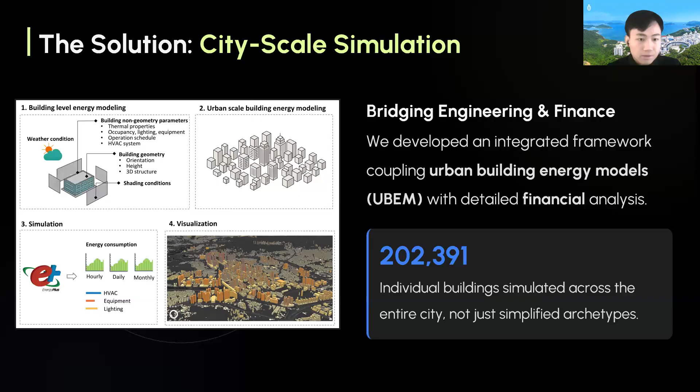To calculate the decarbonization potential, we evaluate 5 retrofit pathways for urban decarbonization: lighting upgrades, chiller replacement, rooftop PV deployment, and upgrades of windows and the envelope. We analyze not only the cost benefits, but also the environmental benefits such as energy savings and carbon reduction.

To support policy decision making, we calculate 5 indicators: energy savings and carbon reduction as the environmental benefits, and financial indicators such as payback period, internal rate of return, and market potential of each retrofit measure.

To provide a more visualization effect, we developed a digital twin platform for urban decarbonization. It's open not only to government but also to the public as an interactive dashboard, and I can switch to our platform and show it now.

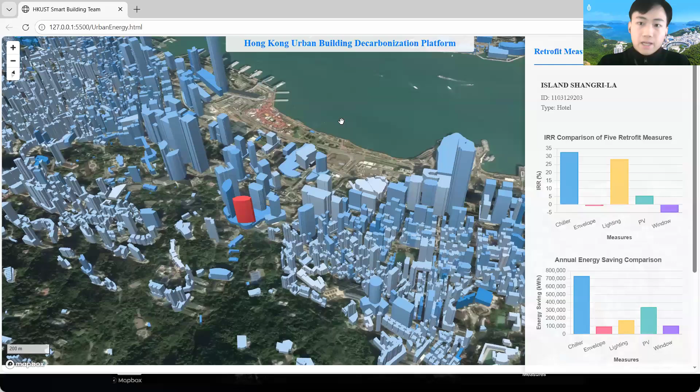And we can see all the buildings in Hong Kong are located in a basic satellite image map. And if we click one building, it first shows some basic information of the buildings,

such as the name of the buildings, the ID in the database, and the type of the buildings. And it will show the internal rate of return of the 5 retrofit measures. We can see in this hotel building, the chiller retrofits achieve the best performance of investment, and the second one is the lighting upgrades. But the envelope and the window upgrades in this hotel building are not economical.

Despite the financial indicators, we also calculate the energy savings and the carbon reductions. We can see the chiller and the PV will achieve the best performance of energy savings and also carbon reduction. For each building, we calculate all the parameters. So in our interactive platform, it will show all the information of the decarbonization potential for all buildings.

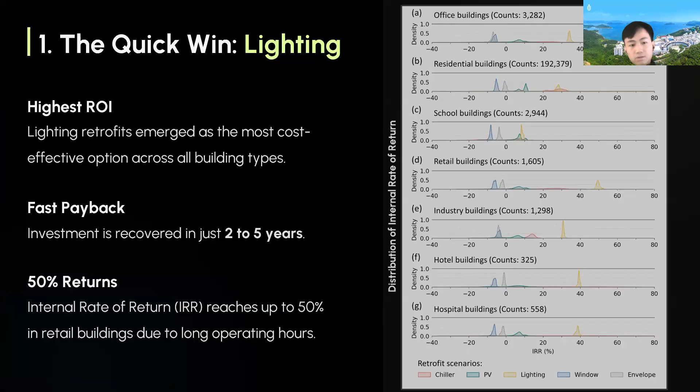So through our analysis of our results, the quick win is the lighting, as the lighting not only shows the highest return on investment across all building types, but also shows the fast payback period, typically from 2 to 5 years. Especially in retail buildings in Hong Kong, the internal rate of return of the lighting retrofits can achieve about 50% due to the retail buildings relying on long operating hours.

Despite that, upgrading the chillers plays a key role for the grid stability in our results because it delivers the highest reduction in peak electricity demands, especially for school buildings, retail buildings, industry buildings, and office buildings in Hong Kong. But it may not always have the highest return on investment.

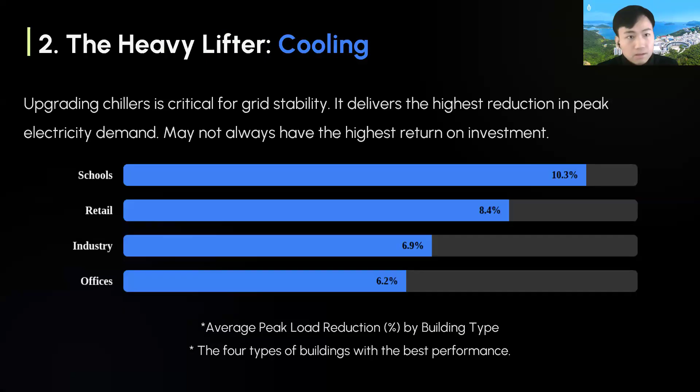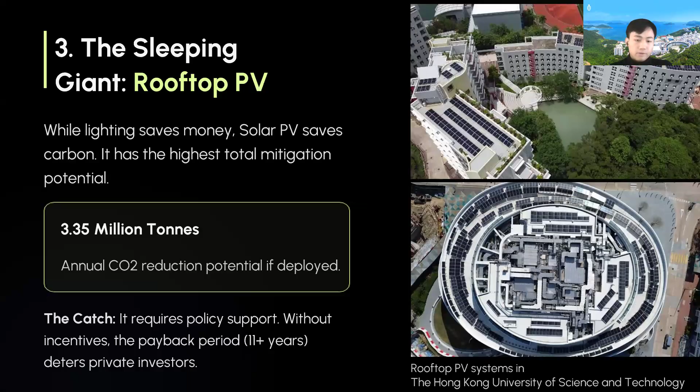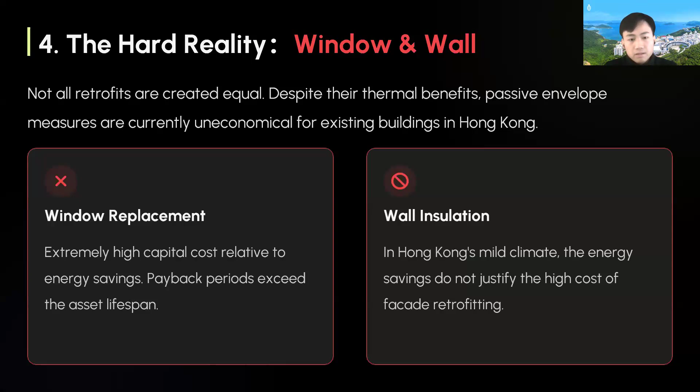But it requires policy support because the payback period of the investment of rooftop PV is often more than 11 years. And through our results, not all the retrofits are economical, such as the window replacement and the wall insulation upgrades, as the upfront investments are quite high, and the energy savings cannot recover the investment costs.

So to support policymaking, we propose to unlock the green finance. If we use an investment threshold of IRR at 50%, we can see the rooftop PV market in Hong Kong is very small. But if we lower the standards from 50% to 5%, the market will expand dramatically, and it will have over 25 billion market potential, and it will also unlock huge carbon emission reduction potential in Hong Kong.

So for the roadmap, we propose 3 strategic steps. The first one is to prioritize the lighting and the cooling retrofits because they have quick return on investment. The second is we can unlock the PV market potential through some policy to lower the IRR standard. And we need also to avoid deep envelope retrofit, such as the envelope and windows in Hong Kong, due to the humid and warm climate condition in Hong Kong.

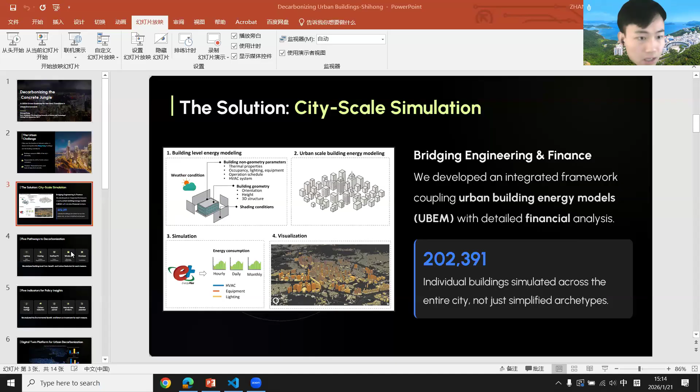As what I introduced, for the energy index, we just use energy savings, the annual electricity savings, and for the carbon reduction it's similar. For the financial indicators, we use payback period through the whole investment lifespan, the internal rate of return, and the market potential—these three indicators for the financial calculation.

Question: About the permeability, do you vary the air change rate depending on climatic conditions? We now use the typical meteorological year as our climate condition input, and we modeled the air change rates. But at this stage, we refer to the building standard and don't consider the variation of air change rates by climate conditions. Maybe in the future we can consider it.

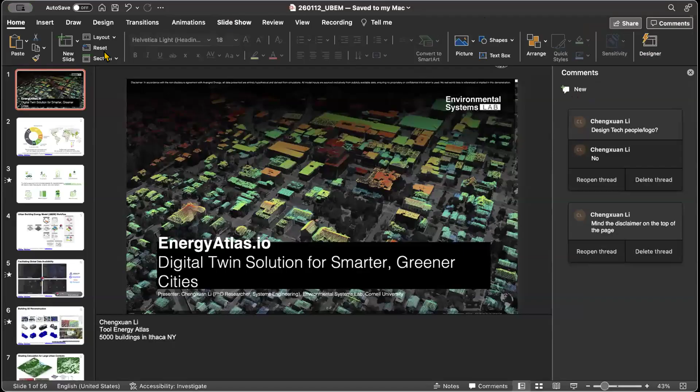Yes, okay. Hi everyone, my name is Chengxuan Li. I'm a PhD researcher in systems engineering in the Environmental Systems Lab, Cornell University. Today I'll be presenting Energy Atlas, the tool or digital twin solution for smarter and greener cities developed at Environmental Systems Lab. I'll be demonstrating a case study of an urban building energy model of the city of Ithaca, New York, simulating 5,000 buildings, etc. Let's kick off.

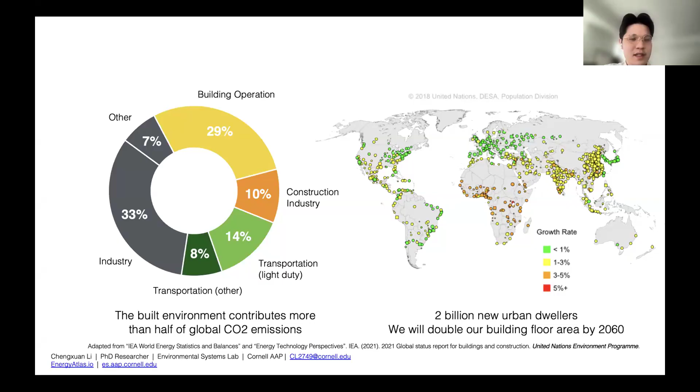Cities are growing rapidly. The built environment contributes more than half of global carbon emissions, and we're doubling our building floor area by 2060. So there's definitely urgency for decarbonization of the building stock. The built environment holds immense potential for decarbonization—we need to make cities greener, smarter, and more resilient.

Urban building energy models present themselves as a great tool to support building sector decarbonization and planning for cities. At Environmental Systems Lab, we have developed a comprehensive workflow that incorporates LiDAR data, building footprints, GIS layer fusion, tax assessment data synthesis, and building archetype diversification to simulate building baseline carbon emissions and plan for potential retrofit scenarios and decarbonization pathways for cities.

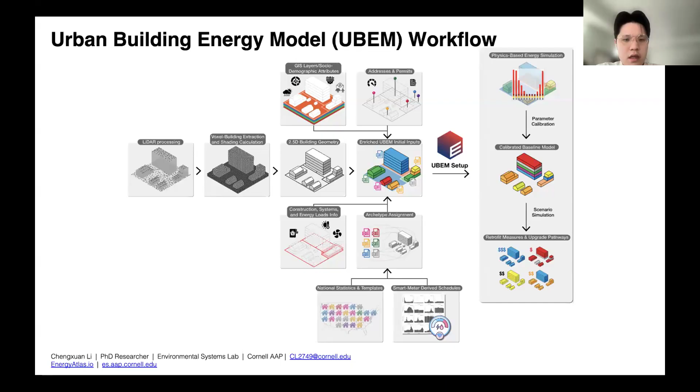Sorry, it's slow to load—the screen is frozen somehow. At Environmental Systems Lab, we have...

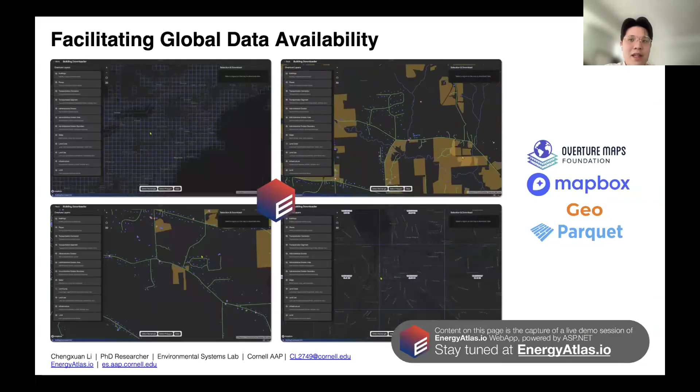At Environmental Systems Lab, we have developed the Energy Atlas UBEM tool to facilitate data availability for UBEM use cases. We consolidate various sources of data, including building footprint, land use and land cover, infrastructure layers, and tax assessment layers available at the global scale, and made them available and accessible through a viewer and downloadable web application interface.

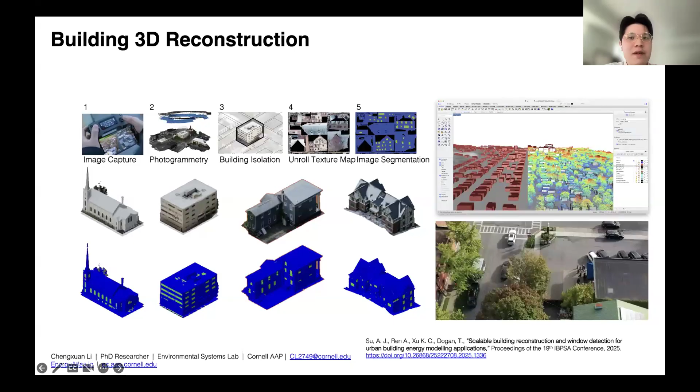For small-scale operations, we also introduced drone photography to reconstruct high fidelity 3D models for urban analysis and energy simulation. These digital reconstructions enable precise rooftop PV assessments, shading calculations, and facade materiality mapping.

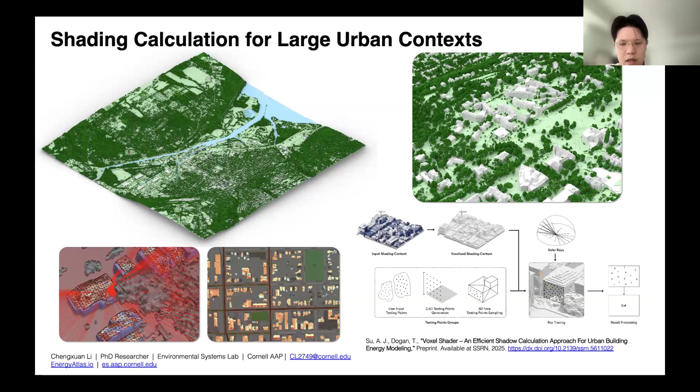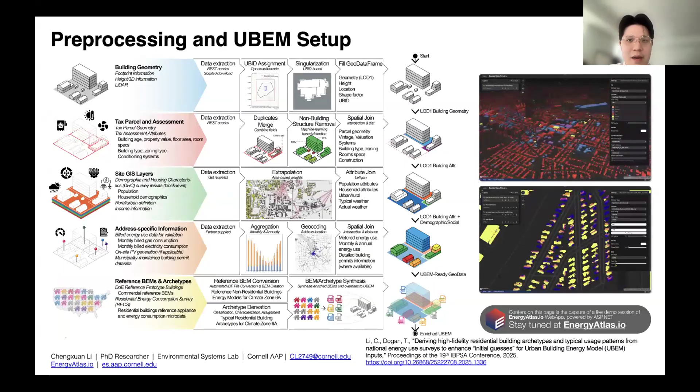For the actual UBEM setup, we developed a workflow integrating LOD1 geometry, GIS layers including tax assessment, zoning, residential energy consumption survey, and commercial building energy consumption survey, and for the United States, address geocoding surveys, reference building settings, and building archetypes to create a data-enriched UBEM ready for simulation.

For the UBEM archetype step, we developed a data-driven archetype formation workflow based on clustering results of the residential energy consumption survey and commercial building energy consumption survey of United States microdata. We developed a method to separate building archetypes into construction archetypes, heating cooling system archetypes, and energy loads archetypes, and trained machine learning models to combine and assign these archetypes for buildings.

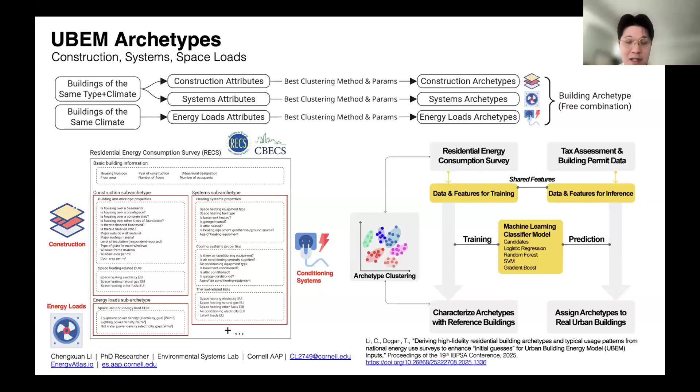Contrary to the established approach of doing archetypes in the urban building energy model industry, we don't do archetyping building by building—we don't do prototype building models. We propose separating them into the construction set of archetypes, including U values, air tightness, etc., the heating cooling system archetypes, including the age and efficiency of the heating cooling system, etc., and the energy loads archetype that captures occupant diversity. This makes it easier to decouple user behavior from system efficiency, and decouple system efficiency from building physical parameters.

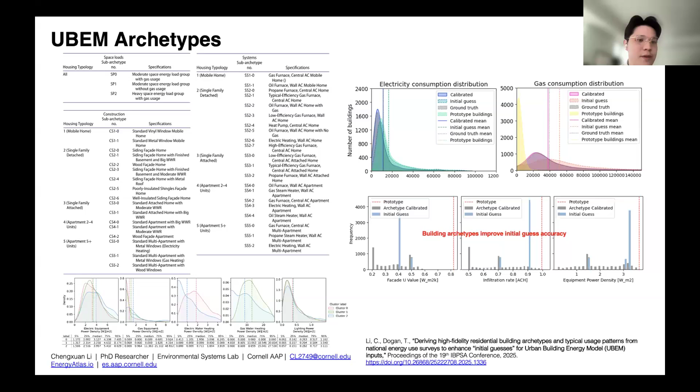With this innovative approach and data-driven workflow of archetype derivation, and the possibility of freely combining archetypes during the assignment process, we are able to improve the initial guess UBEM simulation accuracy and produce much better results than the fixed and singular archetype of the prototype building energy model produced by the Department of Energy of the United States. We understand that archetype is a very daunting word to talk about, and assigning them is especially difficult.

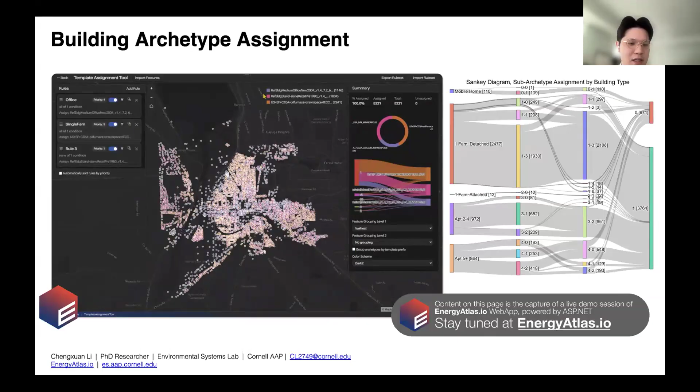Sometimes buildings get assigned archetypes in ways that work against the design intent. So we developed this interactive tool to allow rule-based archetype assignment. It has real-time feedback and real-time visualization, making archetype assignment easier than ever.

After we have assigned archetypes using all the GIS layers of data, we have a UBEM model ready for simulation. For the simulation pipeline, we don't use Energy Plus or equivalent software of the same fidelity level. We believe that for larger UBEM use cases involving groups of more than 1,000 buildings, it's acceptable to use lower order models, although still physics-based, such as the 5R1C model we use to simulate buildings as a trade-off between efficiency and accuracy.

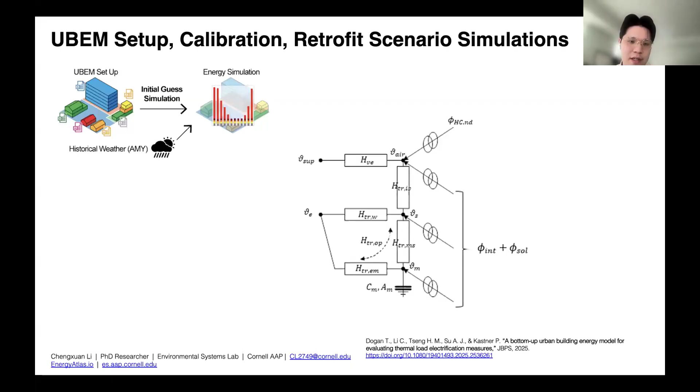Using historical weather, we simulate the baseline energy consumption and compare it with the actual measured energy consumption, then calibrate using an optimization algorithm called BOBYQA. This lets us tune the input parameters for the archetypes so the results match the measured energy consumption data. After fine-tuning and calibrating the input parameters, we have what we call a calibrated baseline.

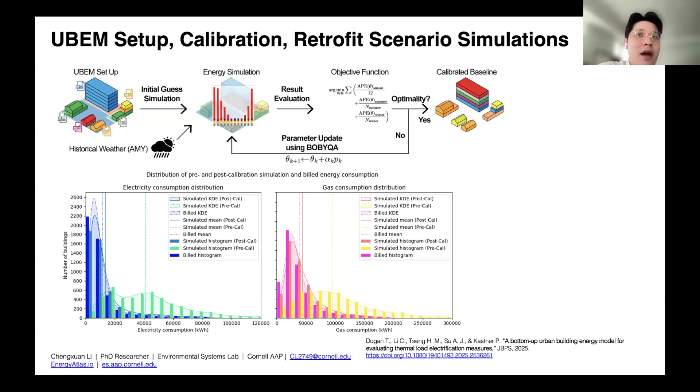With a calibrated baseline and typical meteorological year weather data, we simulate the retrofit scenarios. For the simulation case study of Ithaca, we defined 5 scenarios in addition to the baseline scenario used to calibrate the model.

This includes the full electrification scenario, where we swap the heating and cooling equipment for ASHP, hot water heat pumps, or ground source heat pumps - we call this the equipment electrification scenario. For the second scenario, we raise all the envelopes to the IECC code so they comply with current code and have much better energy efficiency with reduced consumption.

For the third scenario, we combine the first two to simulate an ideal scenario where the building is retrofitted from the bottom up. For the fourth scenario, we combine the first scenario with PV adoption, and for the fifth scenario, we combine everything together.

A quick overview of the results shows that even with only the electrification scenario, we're able to reduce 70% of operational carbon. For the fourth and fifth scenarios, where we combine electrification with PV, or electrification, envelope upgrades and PV, we get very close to net zero.

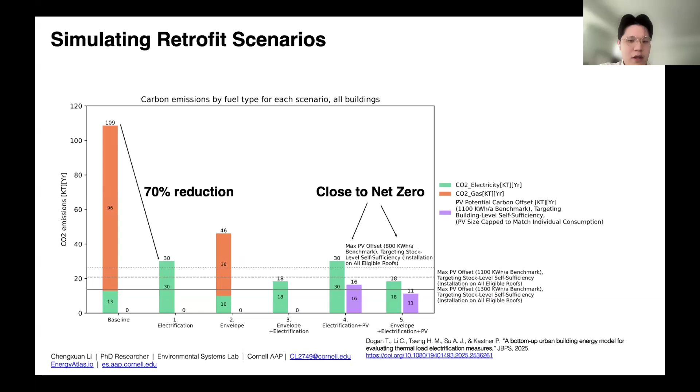This sounds all the way optimistic. However, there are caveats. If we look at how the PV is distributed per sector and per building, we see something that isn't actually working.

The analysis shows the promising capability of PV adoption to support sector-wide energy self-sufficiency. Even if we only install PV moderately - meaning only on roof locations with more than 1,100 kilowatt hours per year generation - we're actually very close to sector-wide self-sufficiency.

However, if we break this down to the individual building scale, the analysis reveals a rather interesting and uneven distribution of PV generation potential. Under the most aggressive PV adoption scenario, more than half of the buildings struggle for self-sufficiency - meaning even if you install PV literally anywhere financially feasible, still half the buildings fail to produce enough electricity for themselves.

This is somehow alarming and indicates that installing PVs on roofs anywhere would only be part of the whole solution. Given the promising capability of PV adoption to support sector-wide energy self-sufficiency, even moderate deployment strategies can yield substantial benefits.

If we look at the costs and the limited capability of PV to support individual building level sufficiency, we see that it's actually a better idea to adopt community incentives for PVs.

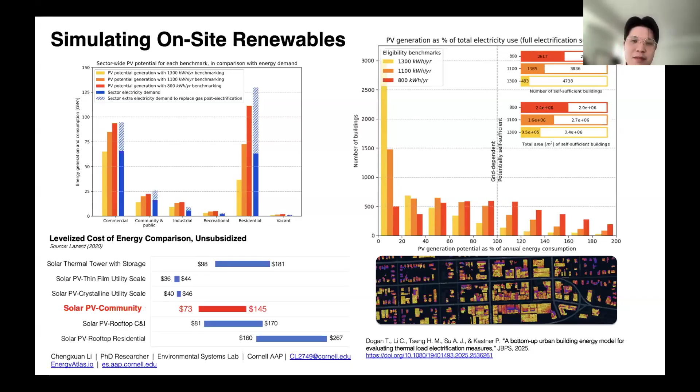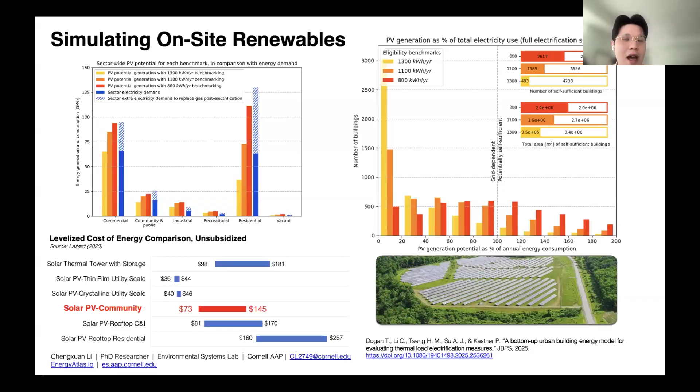So simulating rooftop irradiance maps, like the image in the bottom right, is never the right way to do this alone. We should not only do this, but also look into potential solutions to the self-sufficiency problem of the electricity sector by introducing community PV and community solar arrays.

If we evaluate the different retrofit incentive scenarios affecting economic feasibility, envelope upgrades combined with electrification and especially PV substantially improve payback performance across the building stock. While multifamily and student housing buildings frequently achieve acceptable payback periods, tree-shaded single-family housing and certain downtown mixed-use or commercial buildings remain constrained by limited retrofit programs or high upfront costs inherent to the upgrade scenarios, highlighting that targeted incentives would be crucial to this issue.

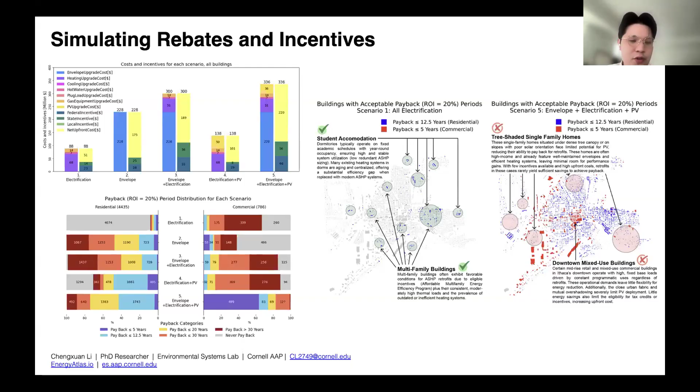We have developed this energy atlas tool, to be released near the end of this month at another IBPSA webinar next Thursday. So please stay tuned and look forward to the pre-alpha release of this energy atlas tool.

Thank you for the brilliant presentation, Chen. We have a couple of questions for you. Let me club two together: Is your research applicable to other cities? And the UBEM you are using is GIS based — for many cities it's difficult to find the height data. If this is missing, which data can be used?

Thanks for the brilliant question. First of all, we designed this tool to be scalable. We understand that most UBEMs are built bespoke for cities or bespoke datasets, and we don't want that. It's not the highest priority to only simulate the most developed, greenest cities to decarbonize them further. We understand it's crucial for us as UBEM modelers or scientists to design our tool in a way that's applicable to the entire globe.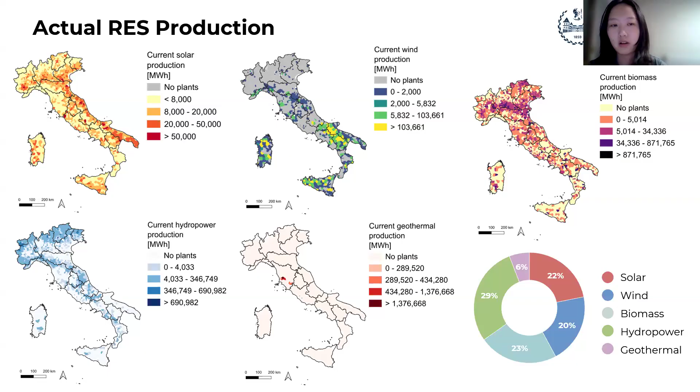But if we're comparing to the future potential, we can say we still have a lot of renewable resources we can use, especially for solar. When evaluating the future potential, the results show the solar potential is much higher than our current resources.

The solar energy depends on the territory, so it's abundant in the south and islands, but it peaks during the day and summer. However, the wind energy in Italy, which is also strong in the south and islands, peaks during the night and winter. So if we want to mix the renewable energy resources, this is critical to understand how we can combine our renewable resources.

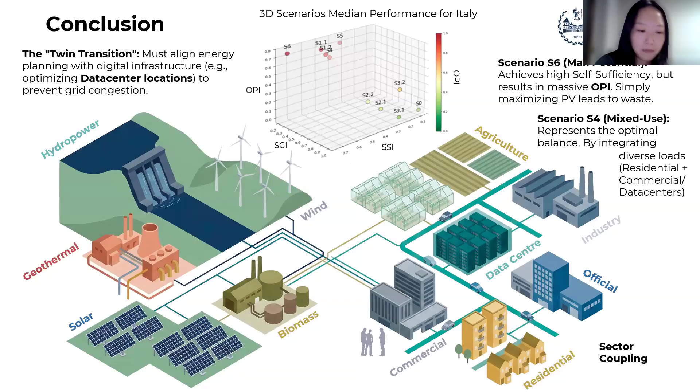Is your work publicly available as of now, and who will be the target user for the platform?

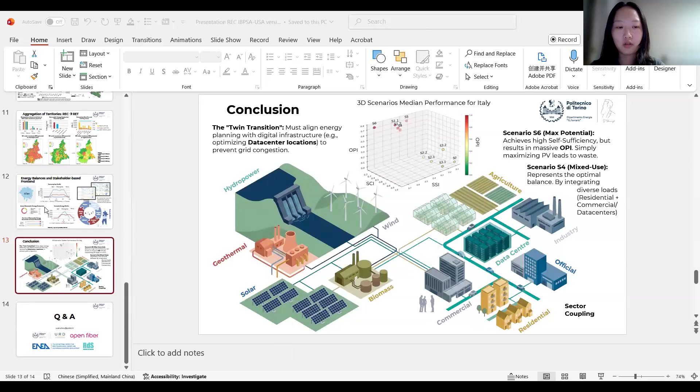Could you repeat it again? Is your work currently available right now publicly? And who is the target user for the platform?

I could say start from the policymaker in the government because they need to develop the renewable energy community in their territories. So if you are the policymaker in Milan, you want to compare with what is your level compared to the median of your region. And also you need to consider how much benefit you can get from your policies.

And then we could also enhance the users, like the energy company, which could use this platform to evaluate if they are going to invest here, or if they want to move their data centers, how much benefit they could get from their decision making. This is a decision making platform.

I would also like to say this is built for everyone, especially for citizens, because as we discussed, this simulation modeling is at building level. So for everyone, they could check their renewable energy resource usage situation in their municipality and also in their districts. And if they're considering developing a small renewable energy community based on their primary cabins, they need to discuss as a member.

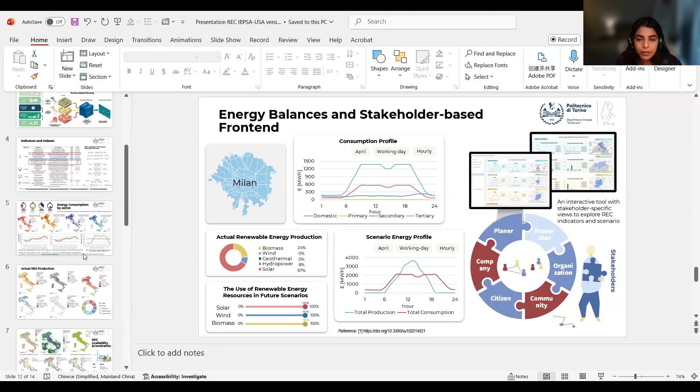And then we evaluate the solar radiation using ArcGIS and also QGIS, some solar simulation tools, and then we go to the building boundary. We create the solar radiation on the roof, and then we choose the technology in Italy as we show here. So we select one technology we will use for the renewable energy analysis. And then we could calculate the production.

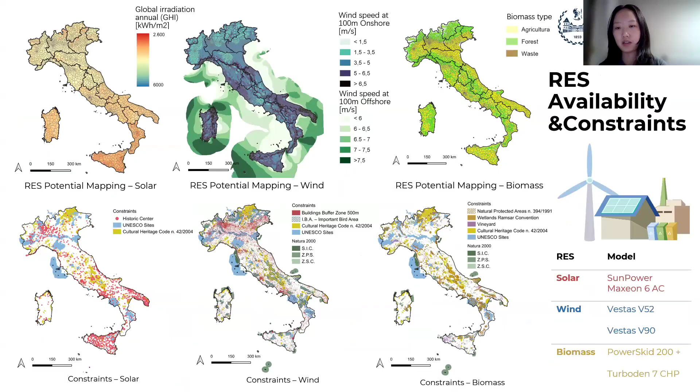And it's also GIS based for consumption, because this framework or this methodology is top to down, not based on building simulation. So we get some data from regional or national government statistics, and then we distribute this data, because this is real data, not simulated data. We distribute the data from regional to province, province to municipal, and then to the district, and then to the building scale.

It's based also on statistics, like for example for residential, we need to consider the number of families, we need to consider the building volume. But if we consider industry, we need to consider if we can get the number of employees, and also we need to consider the peak hour, the peak of energy, the contracts there. So this is all about the energy use, and we need to convert this data considering how we can use it in QGIS and how we can merge or manage this data at national scale. This is the main idea of this GIS-based modeling.

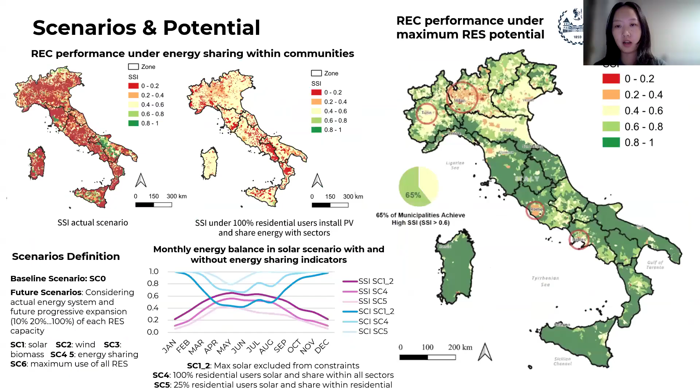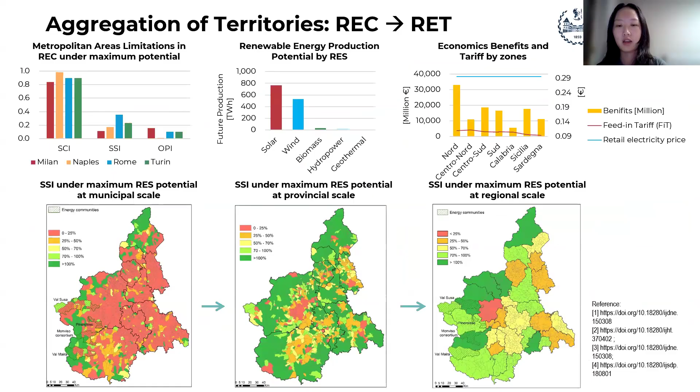One last question: are there economic incentives for renewable energy communities as of now? Until now, the incentive for created renewable energy communities, what we developed in our analysis is only this: how much energy you could sell to the network, only this. We haven't considered other incentives yet, but in the future we can, because now we have the framework.

Because now we have the framework, once we want to calculate any of the policies or indicators, it's just we ask for data, write a formula, and then it can calculate it as soon as possible.